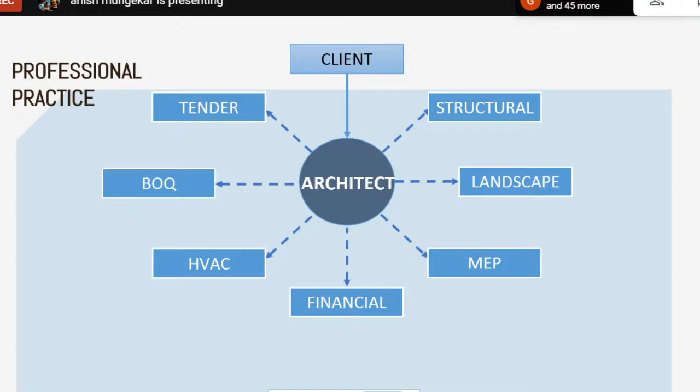But it's always supported by all the consultants. The client gives the project, and from there you design the stuff. After designing and getting approval from local authorities, there's a series of consultants who help you take things further - from the structural engineer to landscape, MEP, HVAC, BOQ, tendering, and of course the financial part, which is a major part that most students neglect but I'd say is the most important part in practical life. Because many times, apart from design, the financial aspect plays a major role in projects.

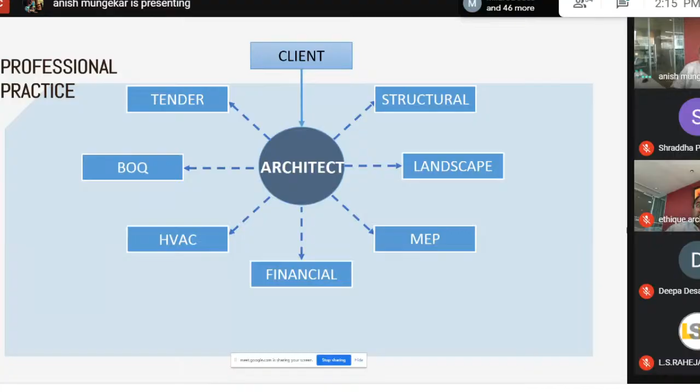Yes, many times we've been designing and there are many failures. For a certain project, we did the presentation the first time and it didn't go through. Second time, it didn't go through. Third time, it didn't go through. Fortunately, the fourth time, it went through. So failure and success are part of every design.

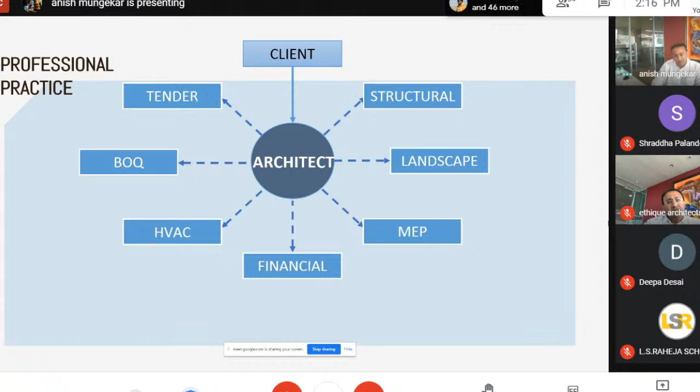So every time, as a student, it's my opinion that when you design something, it's not always that the designs are great and good, but it always comes with experience and a series of discussions with your faculty members. But you should always keep trying and work hard, because there's always 100% scope for improvement in design - even after finalization, there's always scope for development.

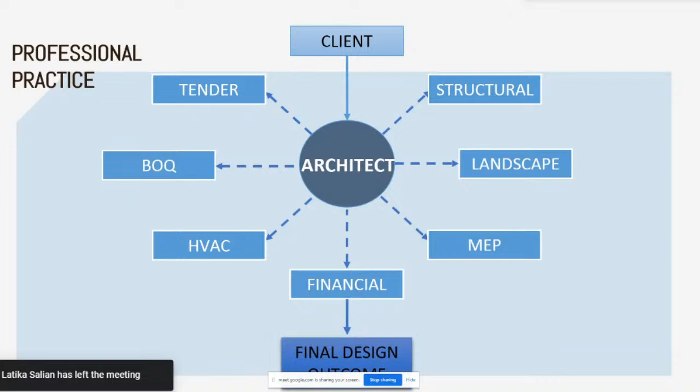Now normally the process goes this way professionally. Every professional gets an email or call from a client, with different plot sizes and different requirements on what to build. Normally, we do a site visit, and every time after the site visit, a detailed case study has to be done - my opinion is everyone needs to do a detailed case study, because every time as an architect you'll be developing maybe a hospital, maybe a commercial project, so every time it's a new story for us.

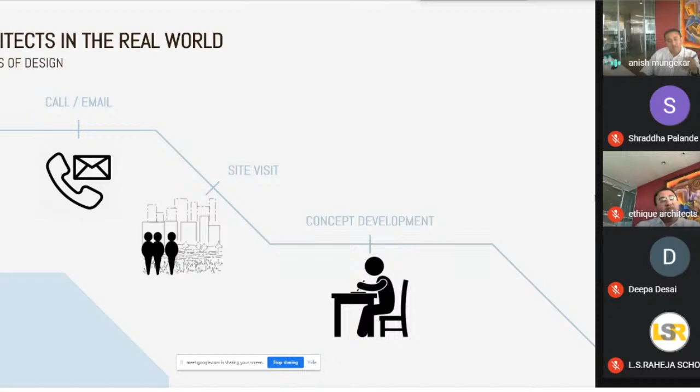But let me tell you one thing - architecture is one of the best professions because it's not like accounts or engineering, where we were taught a formula 30 years back that's still repeated the same way. For us, every project is a new story. The same will be repeated for you all too - today you're designing a residential, tomorrow maybe a big gated community, and sometime a shopping mall. So the case study and detailed study of that particular subject plays a very important role.

Normally, initially every architect - which you're also doing right now - needs to develop a basic concept and thought process of how the thing works. Then after basic sketches, all the architectural drawings, whether done manually or on a computer, a series of designs gets developed. After that, there's normally an engagement with the client, which we call an agreement. Once the agreement is done, we go to the next level of much more detailed drawing development for government approvals and licensing work.

After government approval and before construction, there's a detailed series of good-for-construction drawings that need to be made. Between that, total teamwork has to be considered for the structure, MEP, and everything that plays a role. An architect doesn't just design; they become a central feature where everyone focuses on you, and you need to govern the whole system to ensure the right design carries through during construction.

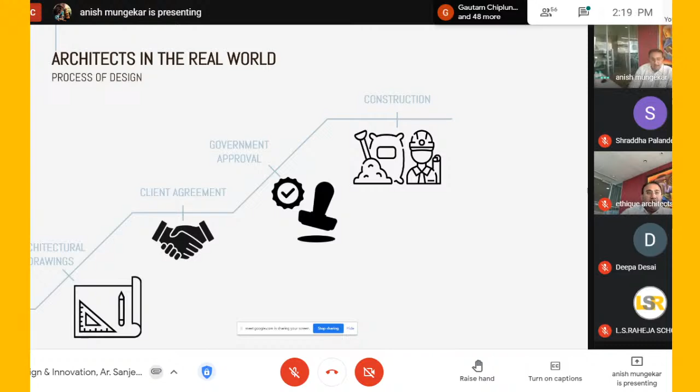Let me show you one of the projects, a gated community. A few years back, we went to the site, almost 20 kilometers from central Pune. The site was totally barren—no water, nothing, not even a tree. It was surprising to think about how we would design on this.

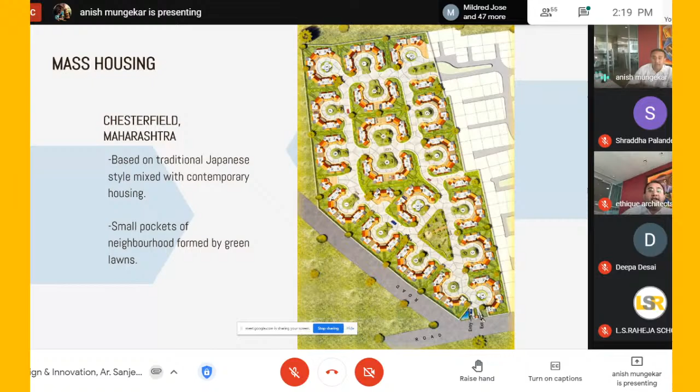The client told us they wanted to create something where people get maximum privacy plus a different kind of community living, and that's where the idea of community living hit. We took a concept where we designed the structure in a clustered fashion, with 6 units together around a central courtyard system.

Initially, we just took the plot and looked at the buildable areas and the central open space, along with the sun direction and the wind.

We decided on a concept like a growing stem with different leaves—the red structures you see on screen are the different community centers, each with a cluster of 6 units and a courtyard in the center.

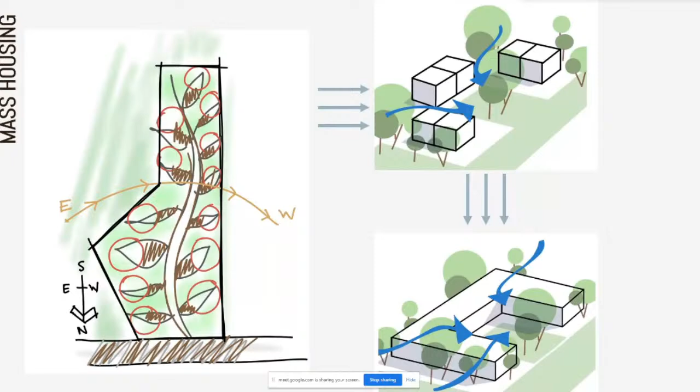We started breaking up the individual masses so wind could flow inside easily. The overall structure became clusters of 6 with a central courtyard, each unit having its own private garden at the rear as well as access to the large central courtyard. This became a nice gathering place for everyone, giving a sense of privacy, and security also increases because you're staying within a group system.

When designing the cluster form, we realized there would be a privacy issue. So we designed a courtyard in every area with a large tree, so the trees would obstruct views and give every unit privacy.

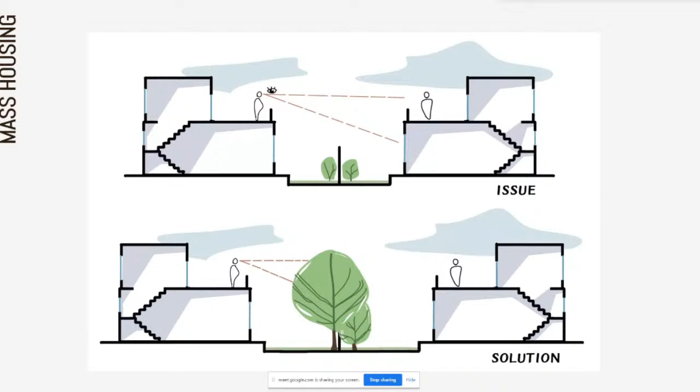Another structure we're currently designing, about 30% completed, is going to be a very different kind of structure. It has a main junction road in the center, and the key challenge was designing something that could really be highlighted from the road.

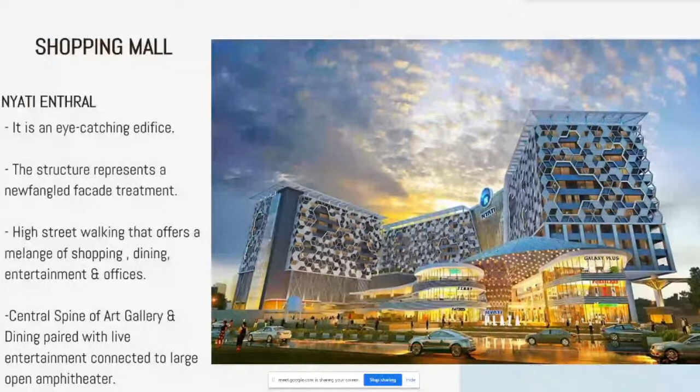Everyone knows everything is available online now, and most shopping malls and retail facilities aren't working well. This was a big challenge for us—once construction is completed after 2 years, how can it still balance proper sales with people coming in and using it extensively.

We tried to create a nice walking street based on the concept of a typical Pune Wada style. The street is designed to be more than 600 to 700 feet long, probably the largest walking street in Maharashtra with a shopping mall around it, completely filled with artifacts and art areas where any artist can display their work or a musician can perform.

The facade design has been done so you get completely different shades of lighting throughout the year, so every 2 to 3 months the whole structure feels like it's been designed separately.

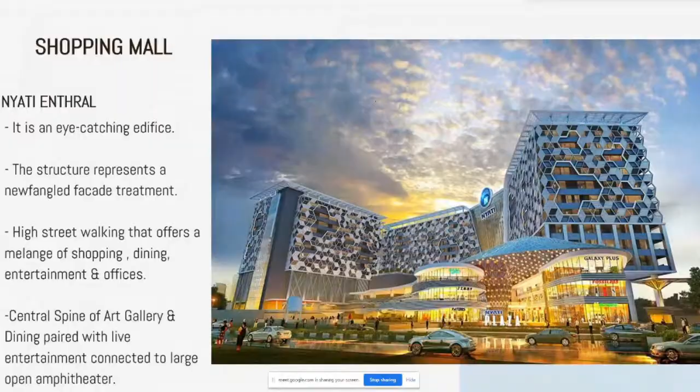After designing so many of these things, we realized that many structures in India are not user friendly for senior housing. So we came up with a concept to design housing purely for seniors. We did a few projects and a lot of study on where senior housing exists, how they function, and how it can be designed.

So there's a concept called senior housing, where the houses are pretty compact, more comfortable for a senior to use, easier to navigate, and requiring very little maintenance. It's a different kind of housing concept where seniors, anyone above 55 or 60, stay together and form a nice big community.

Normally there are different kinds of senior housing in India and abroad. Some are long-term care, some are just assisted living residences. Some are only for people with dementia or other conditions, and some are totally independent with complete services and activities in the community.

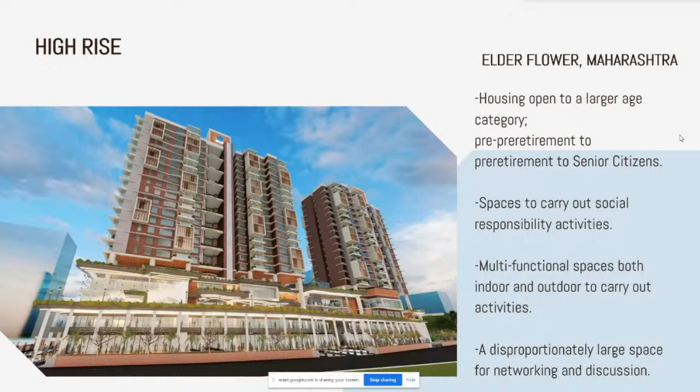We tried to create a huge walking street on the ground floor with huge shopping, and on the first, second and third levels we designed a huge club, almost 30 to 40,000 square feet, with activities from the spa to the swimming pool and everything. This was the basic concept in our mind.

When you do a large structure, you normally see a monotonous result everywhere. A normal architect just puts a tower on top with horizontal shopping and parking below. We tried to break a small cutout at the lower level with huge open terraces, and on the ground we gave the overall look of a pillar of strength, an arcade like a normal pillar giving the shopping a complete high-end walk.

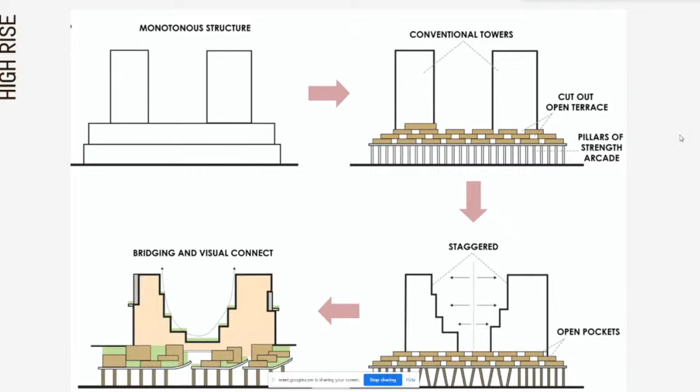Then we slowly started bridging the gap to create a visual connection. We broke the structure, and ultimately, as you can see in the last slide, there are lots of terraces and open spaces created on the lower and upper levels. The whole structure was staggered to get a more visual balance on both sides.

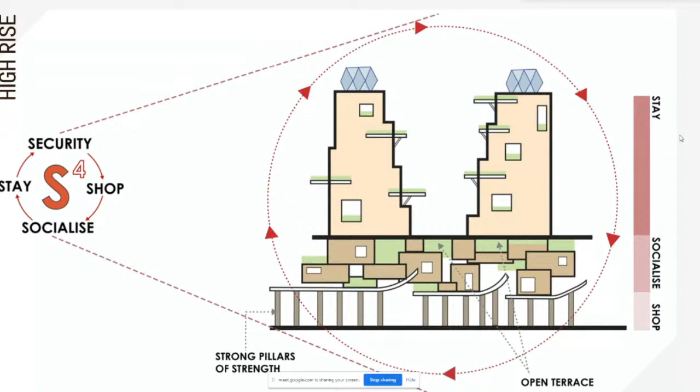So this was the final product, designed around the concept of S4. S4 means staying, security, shopping and socialize. So seniors don't have to worry about going out, it's everything inside, like a small world, a complete cycle where you shop, socialize and stay. All the activities, from daycare to spa, have been designed in this manner.

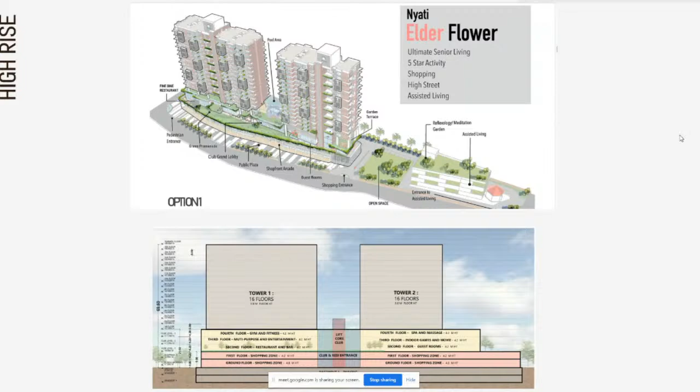So these are some photographs you can see on your screen right now, showing huge open gardens at the deck level, and on the top level there's a huge swimming pool with different kinds of activities.

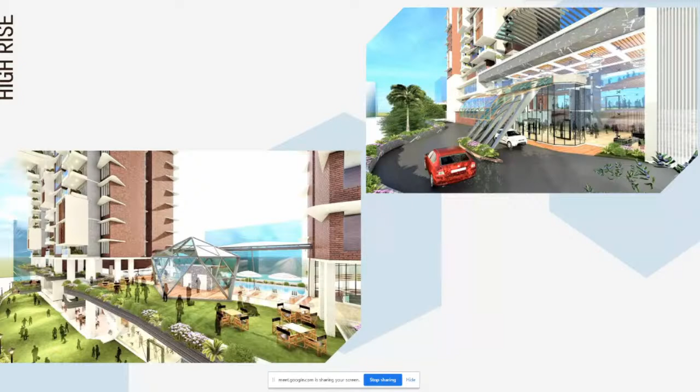Now there was another one of the concepts we did, which is a very low-key structure. We went to this site and I was talking to the client, and it was a very different thought process in it because of the huge contour, almost a span of 80 to 90 feet.

This project was in Lavasa, and normally one believes that senior housing should be flat, wheelchair friendly everywhere. So this was one of the biggest challenges for us to design this kind of structure on a contour of 70 to 80 feet, whereas almost every house and all the roads need to be wheelchair friendly. Yes, it's altogether different. All the activities, clubs and everything need to be at the same level. So this was the overall layout.

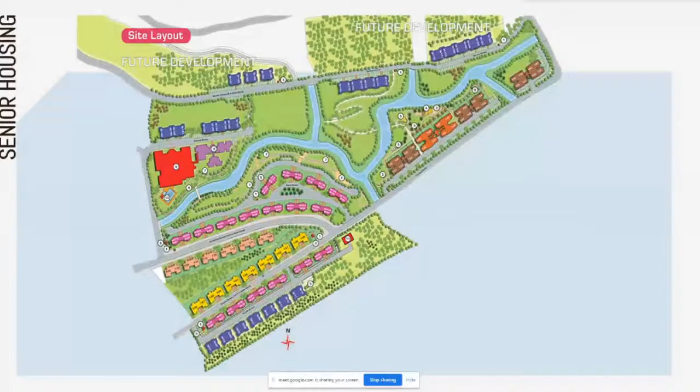When we saw the site, there was a beautiful water body running in the center of the plot, and we said, wow, this is going to be a great project to deal with. We decided to keep the same water body, just connecting all the structures through bridges over the water body. On one side we took all the club activity, and on the other side all the houses. These are some of the pictures showing senior housing balanced nicely with nature.

There was one more senior housing project we are doing in Goa, which is a ground plus 4-story structure with a similar kind of system. The contour was almost 40 to 45 feet in a span of 5 to 6 acres. It was a big challenge because the site was pretty small and the contour was very high.

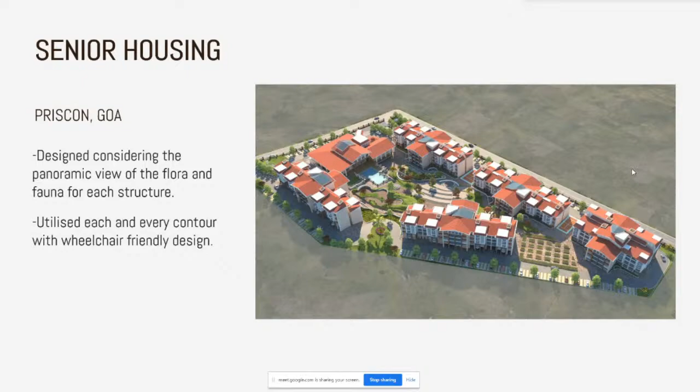We tried to design it in such a way that everything is inward looking, so that all the residents and apartments for the seniors face toward the club and garden area. All car movement is on the periphery side, so there's no car movement inside the complex. All vehicular entry is taken on the peripheral side. If you see the layout, it's a different structure, and all vehicular activities are taken in the corner, on the side of the periphery.

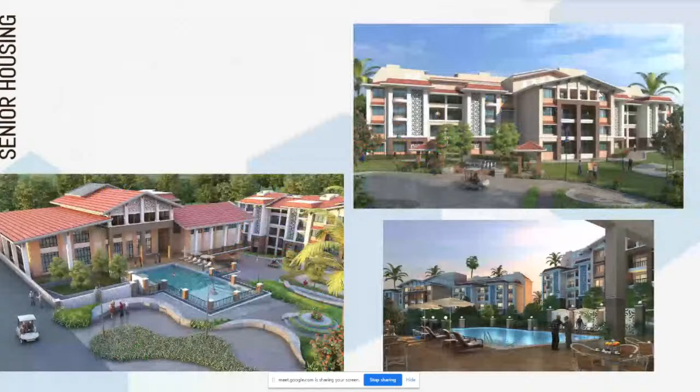So this is the overall glimpse of how it's going to be a senior living.

Now, everyone might be confused as to why I've been talking about senior living, because I'd like to explain the difference between senior living and normal housing. I would say it's more or less the same, but with certain specifications normally required for people after 60 years of age, like things from grab bars to switches to color coding to flooring - everywhere the specification needs to be studied in detail. So this is how basic senior housing living is coming up in India in a very large way.

So these are some of the projects which we are doing right now in India, and the different kinds of concepts, showing how we approach things in different ways.

Now, I would request any of the faculty members, if they have any query or questions regarding how we work professionally, or how students need to be taken care of when they go out and work professionally. I have seen many students who just finish architecture and start their practice.

Yes, that's good. But for us, for example, we started practice immediately after leaving college. We lost our first project, we lost the second project, we lost the third project, we lost the fourth project. But then slowly, yes, failure has always given us a lot of success. So I would recommend to everyone that at every stage of failure you learn something, and I think that's a big thing for everyone - to get a good failure, maybe at an initial stage, not necessarily, but yes, it can be a big thing.

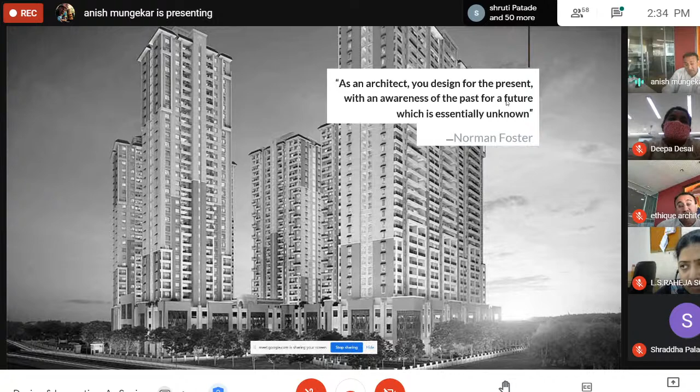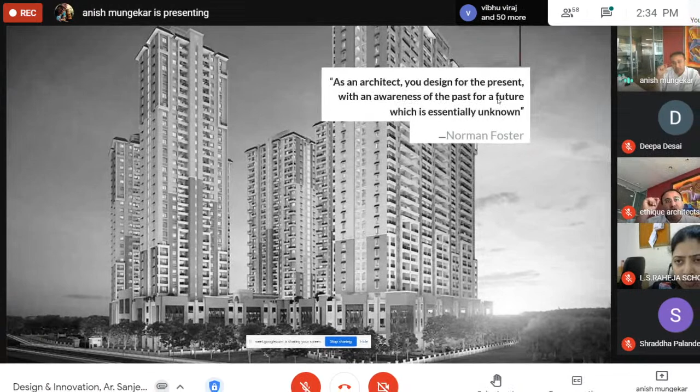Yeah, Meghna, to be very honest with you, till date, we do a lot of case study before we start any project. Case study really helps us, even at this stage after 25 years of experience, to design a project much better, because it gives you much more detailed understanding of what you needed, what you're missing. It's not always that we are right. Whenever we design, we always feel that yes, this is the best design. But when you see a lot of other projects in the case study, you realize you really need to improve the thing, and that's how you start with a case study.

Even for senior housing, when we started doing many senior housing projects, we did a lot of case studies in India, in the US, and in a few other countries, to understand how seniors work and what their requirements are. So the case study, I would say, is the first part of it.

Study of the site is very important. Study of the soil condition is very important, which most people just study on paper, the contour drawing and all. No, I would say it's a more important part when you can visualize it by going on the site. It's altogether a different thing. Maybe on paper everything looked great, but when you go on site and visualize it, taking into consideration a lot of other parameters, everything needs to be considered from your case study to the site visit.

That's very important. So then how is practice different from, say, learning today as a design project? How is a brief different, or is it any different?

See, when I was in first year of architecture in the same college where we are talking right now, and even in the final year, the design process we used to follow, like from the case study to the block model to the sketches and then going further, today we're doing the same thing.

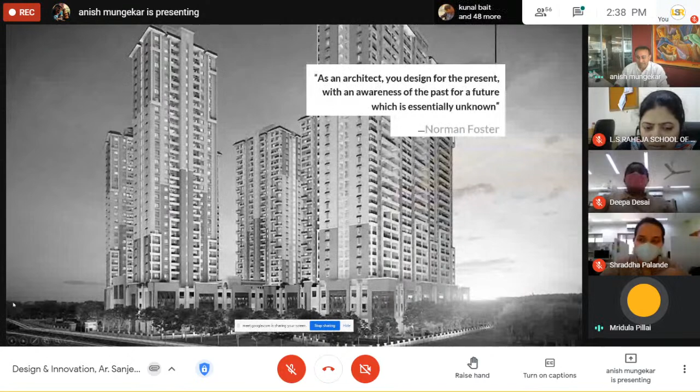Thank you, sir. Thank you. Anybody else with any questions? Yeah, I had a question, so if you could clarify for the students.

When you talk about design, there are always parameters you have to take into consideration when you begin designing. So how do you draw the line between client-centric parameters and design-centric parameters, where it relates to site, where it relates to cost, or maybe even relates to ecology or sustainability? In terms of parameters you consider when designing, since they relate to so many different entities - the client, the cost aspect, the sustainability aspect, the site constraints - how do you put together which parameters you give preference or prominence to? How do you structure your own design process in that sense?

Every architect has their own process, and I won't say any architect is bad or good - all are good architects. It's only about how you take your parameters into consideration. Answering your question, when we start a project we get different parameters, the requirements from the client. Many times it's an open-ended plot, and the client tells us to study the vicinity and tell them what can generate good money on that plot. In professional life, more things revolve around finances and how much the developer or government institution will benefit. It's never like college, where you design and get a first level, second level, or third grade level.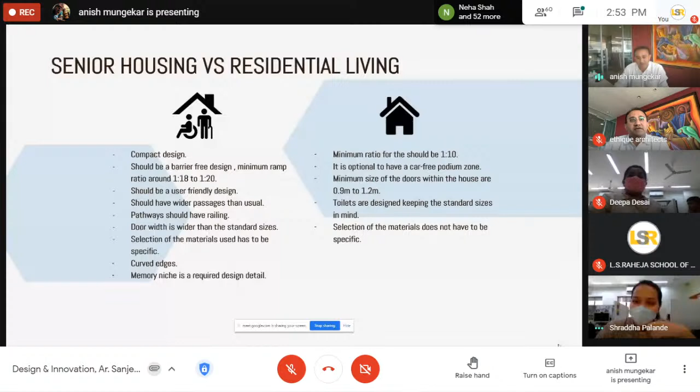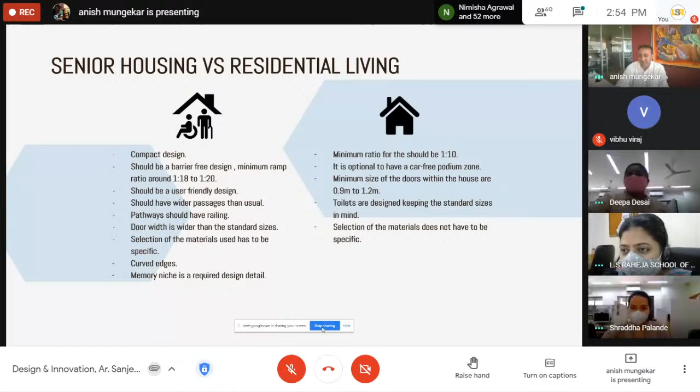Thank you so much sir for being so patient with our questions. Thanks, it was nice talking to you all, thanks very much. Thank you sir, one minute - Deepa ma'am, if you want to go. Yeah, thank you so much sir, it was really a very insightful session and we are all very much enlightened by your talk, the interaction, as well as the presentation and the projects you discussed with us. Thank you very much. Thanks, thank you sir. Thank you, thank you sir. Yeah bye, bye bye sir, thank you so much for your time, bye.